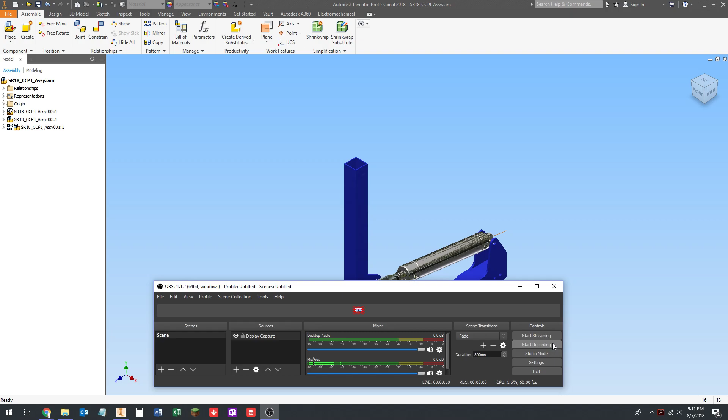Alright guys, we're back with our pneumatic pivot project. This is part 4. What we're going to do here is we're going to go through and we're just going to add fasteners to this.

There's not a lot. Essentially we're just going to put screws in either side of the standoff for the main pivot. We're going to put a screw and some washers to act as spacers on this end of the air cylinder, and we're going to do the same thing. We're going to put a screw and washers for spacers on this end.

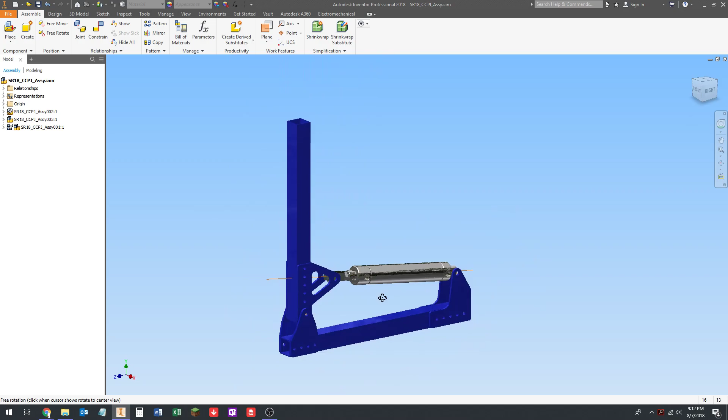For the washers, I'll show you guys how to use the pattern feature in an assembly, which is something we haven't really messed with in the CAD class just yet. Stuff we're not going to do, I'm not going to put rivets in. We never do that in CAD for FRC. It would take too long and doesn't really serve any purpose. The rivet heads don't stick out very much, and if there's any time where we're worried about a rivet hitting or something, we kind of just take some measurements to see if we have room.

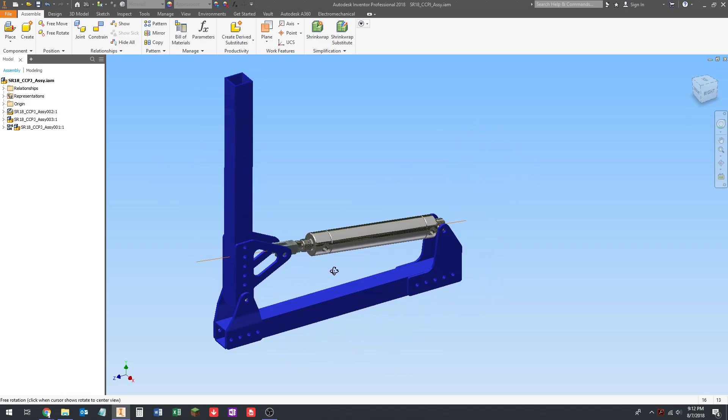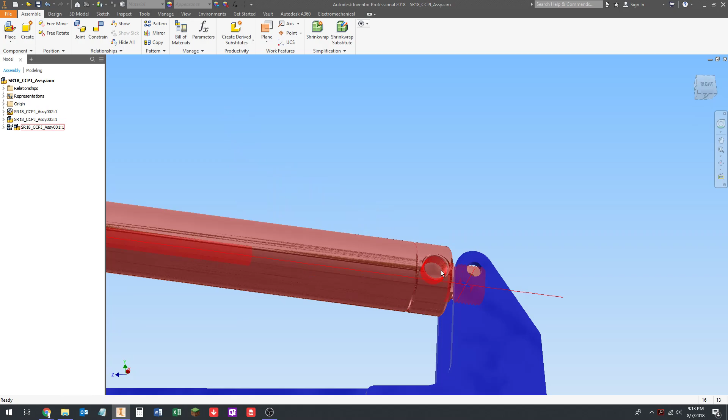And we're also not going to put fittings in the air cylinders. I don't think we've ever actually had an occasion to do that in our CAD models. If you're worried about clearance, you could put a fitting in there. Typically we kind of just eyeball it, and I can tell by looking at this, there's enough room to put a fitting here. It'd be a little close because the fitting does extend beyond the edge of the hole a little bit, but I don't see any problem there.

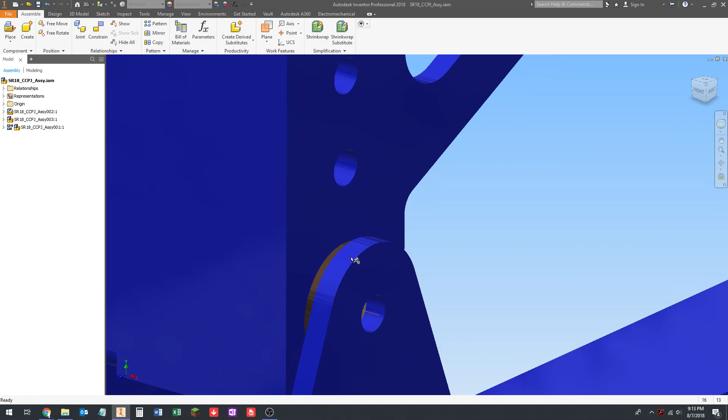Okay, so what we're gonna do is, well, I'll start with these because these are easy. So it's an 1/8 inch thick bracket going into a threaded hole. Threaded hole is about 1/2 inch deep. Typically, when we're putting screws in the end of standoffs, we pretty much always use 1/2 inch long screws. That's what we keep the most in stock, and the thread depth, especially when you take out this 1/8 of an inch for this plate, there's plenty of thread depth for them. So that's what we typically use.

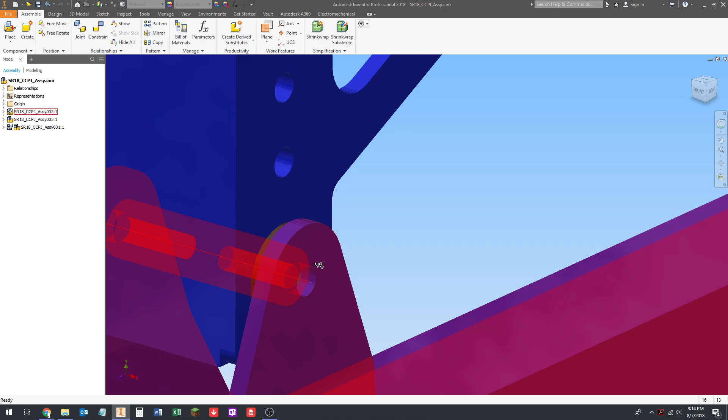I think we're going to use a button head just because it'll look nice here. Depending on what the application is, you could use a button head or a normal socket head. A socket head, you'd be able to get tighter without risking the screw stripping out. But you might need clearance for a button head or something. So we're going to use a button head. So this will be a button head cap screw.

Just going to download the CAD models from McMaster-Carr like we usually do. So it's going to be these alloy steel ones with the black oxide finish. They're the cheapest. We don't really need a lot of corrosion resistance. I talked a lot more in detail about different fasteners and stuff in the gearbox project. So if you haven't watched those videos, or if you weren't in the class, be sure to check those out because we go into a little bit more detail about some of our fastener selections.

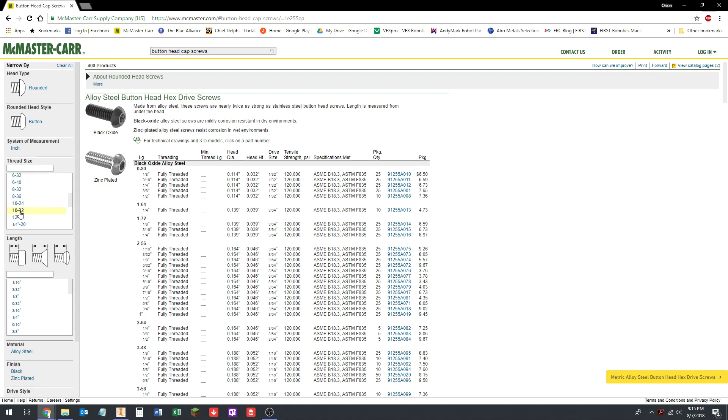So the thread designation was a 10-32 for the standoff, so we're going to pick 10-32 for the thread size. The length, 1/2 inch as measured from under the head to the end of the screw. So we're going to pick this black oxide steel one. Click on the part number, go to product detail, save it, give us a step file. So we're going to cut that out of there. I think I have it open. Yep. Alright, just going to paste this in here.

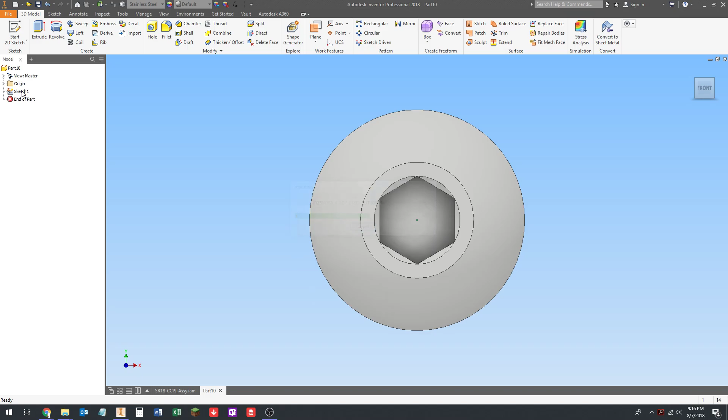This is something I do a lot, an archive folder, so I can throw old step files in there so that they don't get in my way, because there's no preview for the step file in Inventor, so you can't see what it is you're opening, and looking at file names can sometimes take a long time. So alright, we're going to open this up. That's the one we got there. Wait for it to load, click OK. Oops. Come on. Delete the sketch.

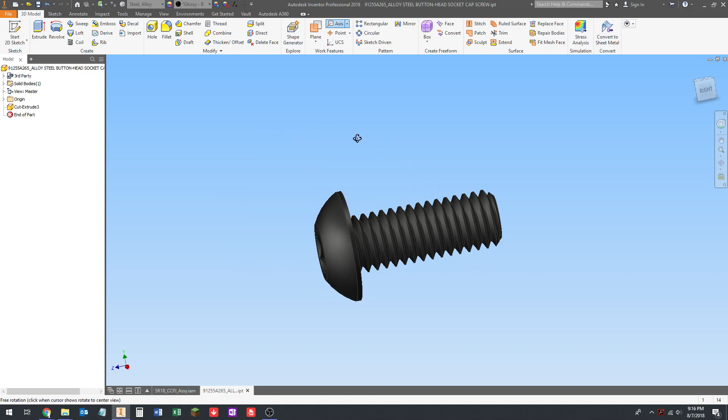We're going to pick steel alloy. Then I usually go for this glossy black color because it shows up nicely. Alright, so we got to pick a cylindrical surface, get an axis in there. We'll just go with the rim here. I think the domed head would work as well, but the rim's definitely a cylinder. So give that a save.

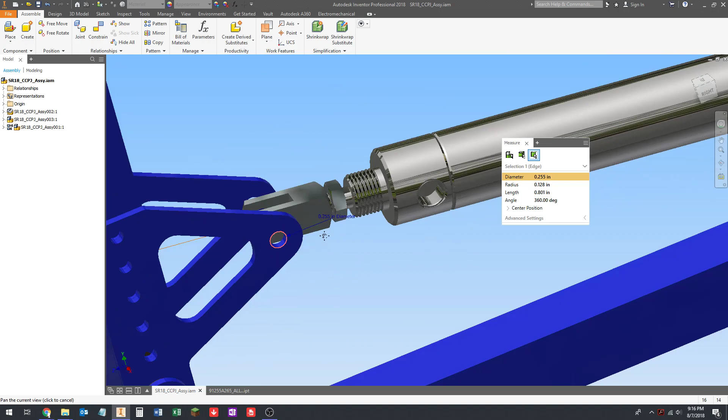We're not going to put these in just yet. I'm going to go ahead and get the rest of our CAD models going here. So let's measure this here; activate the measure tool with the M key usually. So it's a 1/4 inch, and we're going to measure from the outside to the outside. So we need 1 1/4, and then we're going to need a nut on this side.

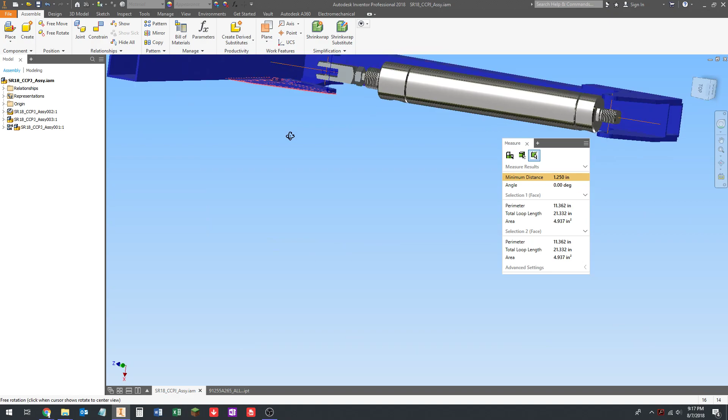Now what we're going to do is use a Nylock nut. What a Nylock nut allows us to do is we don't have to tighten it down all the way, and it won't come off. If we just used a normal nut, in order to get it tight we would have to smash these two plates together, which would bend them and damage the mechanism. So we need a nut that we can put on, and it won't come off, which a Nylock nut allows us to do.

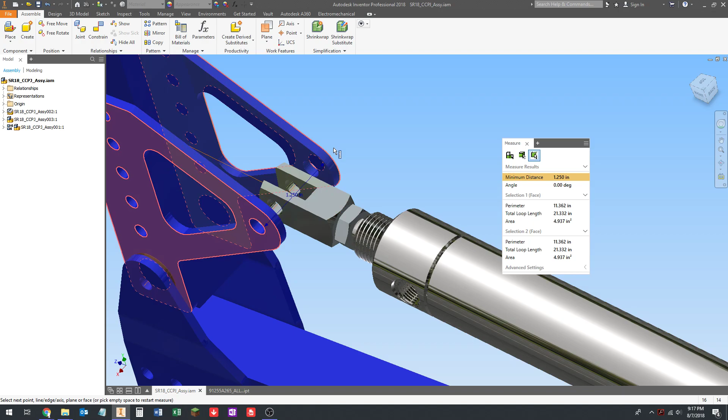Now, I think I'm going to do two different methods. I'm going to do a screw and a Nylock nut in one place, and in the other place I'm going to use a shoulder screw. And you can do either. With a nice fractional number like this, I believe you can get shoulder screws 1 1/4 inch long pretty easily. Typically you would use one or the other, but for this example I'm going to do one of each so that we can see both.

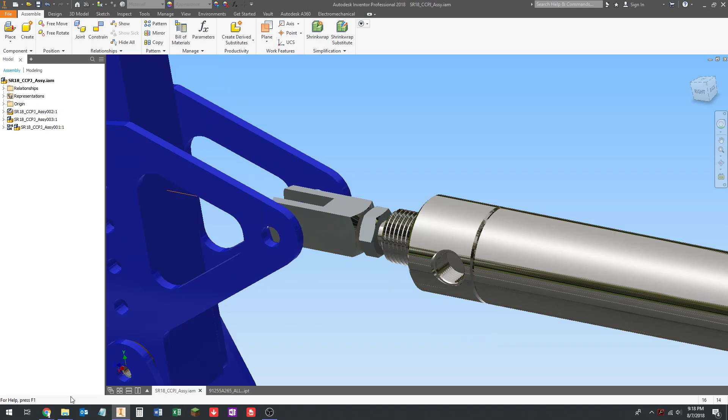So let's go look how tall the nut is first. Let's look at Nylock nuts, 1/4-20. They're going to be zinc plated. I can never remember what grade it is. So grade 5. I believe it's usually grade 5 that we use. It doesn't really matter for this because of the outside dimensions.

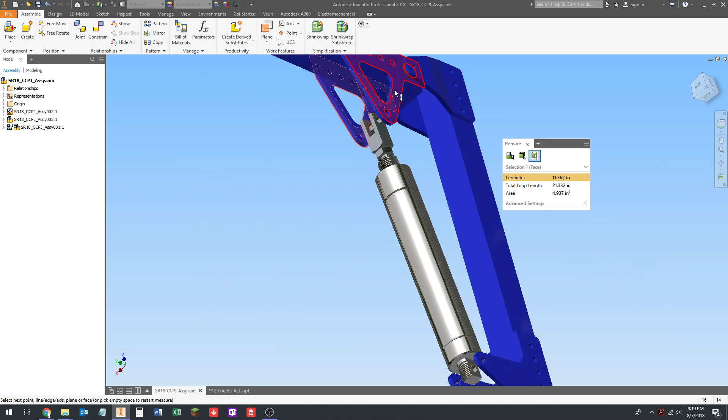Okay, so this is what I wanted to look at. The nut is 5/16 of an inch long. So we've got 1 1/4 inch plus 5/16, which is 1 and 9/16 inches. And the end of the screw is tapered a little bit, so you've got to make sure you get a full thread in the nylon. You don't want just the tip of the screw coming through because the tip doesn't have full threads. You want a section of the screw with full threads going through the Nylock portion.

So we're probably going to have to go with 1 3/4. It's going to stick out quite a bit on the back side of the nut, but that's a nice fractional size that we would have. I don't even know if you can get 1 5/8, but 1 5/8 is probably cutting it a little close. You probably wouldn't have a full thread here.

So we're going to download this CAD model. This is a 1/4-20 because, as I mentioned, this is a 1/4 inch. You could use 1/4-28 if you wanted. That did not save. There we go. It's pretty common with FRC teams to use 1/4-20 stuff, so that's why I'm doing that. We talked about that a little bit in the gearbox project. All right, so we're going to do a socket head cap screw. We're not going to use a button head here.

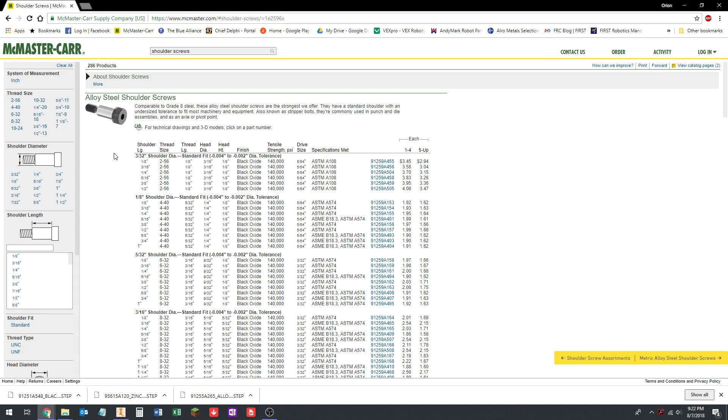So we know this one's the same, it's 1 1/4 inch. So let's do shoulder screws, alloy steel. We know the shoulder diameter is going to be 1/4 inch because that's what the part's going to be as a pin. So basically, the shoulder length is going to be our 1 1/4. That's a fairly common size. Shoulder screws always come in coarse threads, so we're going to have to do a 10-24, probably Nylock nut for this.

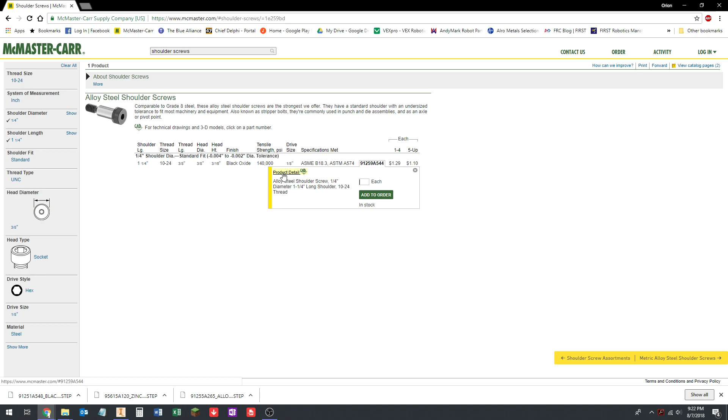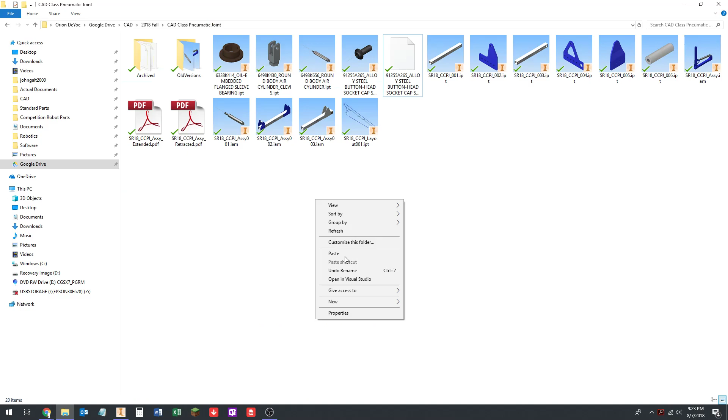Which means we're going to have to download another CAD model. All right, so let's download this. I'm going to rename this file because I know the 10-24 one's going to be named the same thing, so I want to make sure we differentiate between the two. Don't need that anymore, I'm going to archive that. You could probably just delete those usually, but I don't want to mess with it right now.

All right, so now we're going to get a 10-24 Nylock nut. So grade 5. Oops. I don't know, oh, so you only get low strength.

I don't normally order my nuts from McMaster-Carr because you can get them cheaper in bulk quantities from other suppliers. So typically for Nylock nuts, I'm not ordering them from here. I believe they are grade 5 from where I order them. I don't pay a lot of attention to it because in FRC it doesn't really matter.

Okay, so this is going to be a 10-24. Like I said, I'm just renaming these files so I can tell when I import them which is which. Cut that out and paste it in here.

All right, so we need washers to act as spacers. So flat washers, general purpose washers. Oops, keep going past it. 1/4 inch, 18-8 stainless steel is going to be the most common one. Just going to save that.

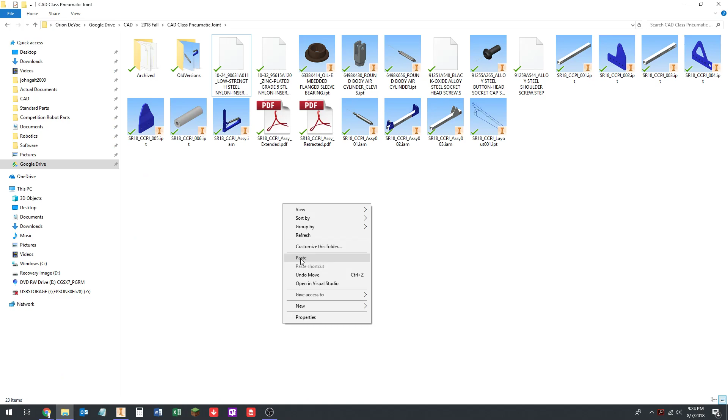All right, okay, so to review, we've got 5 fasteners here. So we've got, I'm going to go back to the CAD model here. So we've got a 1/4-20 socket head screw for in here.

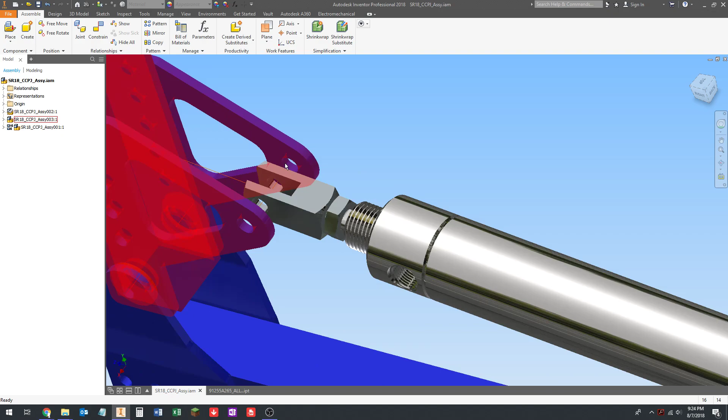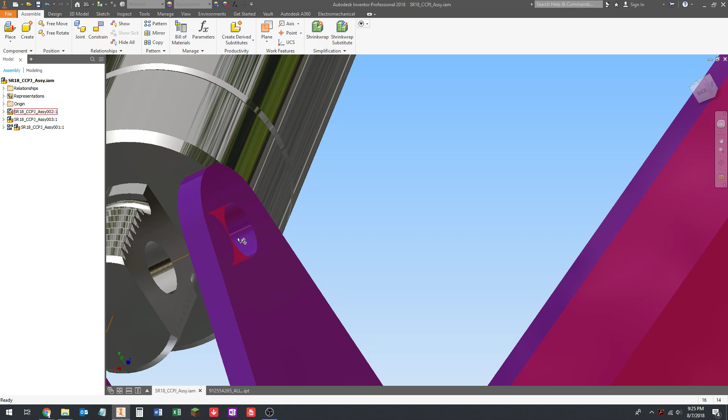That screw is going to have a Nylock nut that's not going to be tightened down all the way, it's just going to be tightened so it just barely touches this plate. Then we've got washers that are going to act as spacers in here. Then on this end, we're going to have a shoulder screw. The shoulder is going to be flush at this end, and then we're going to tighten the nut down, and we can actually tighten the nut down on the shoulder. The shoulder screw itself will be fairly loose, but it'll be held firmly in place, and that'll act as a better pin. And then once again, we're going to use washers as spacers.

So let's start importing, let's import all our files, and then we'll go into the assembly and put everything together. All right, so I'm just going to start at the beginning of the list and start going through setting materials. So this is going to be steel, and then I'm going to set the appearance to zinc because these are zinc plated. I'm also going to change, this is what I typically do, I go up to the solid bodies. For those of you who remember with the air cylinder, we talked about solid bodies.

Same thing here, you can color solid bodies separately in Inventor. So typically I go find this nylon thing and I just color it a nylon color, Nylon 6. That's fine. Alright, so then we need a work axis. I'm going to pick the work axis tool, pick some round surface, in this case this radius here, put that in there, and save that.

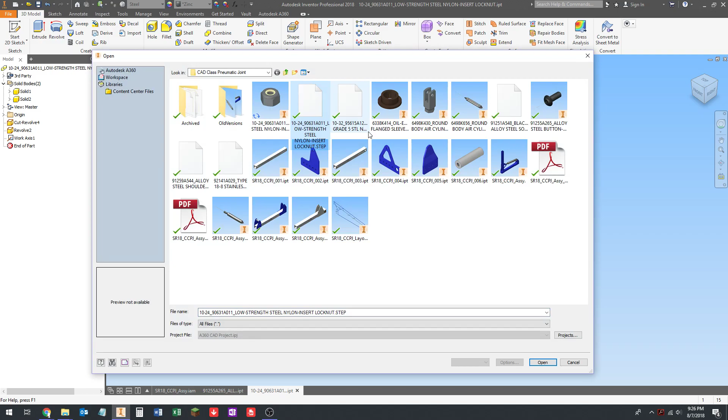Alright, so now I'm going to open again. So we did this one, we're going to do this one next, which is going to be the other nut, the 10-32 one. So that was the 10-24, this is the 10-32. Alright, so delete the sketch.

Set the material to steel, set the appearance to zinc, which I zoomed, go to the solid bodies, pick the nylon one, go up and set that to a nylon color, then pick the work axis tool, pick a round surface. Alright, give it a save.

I'm just using Control S to save, and then I'm going to use Control O to open. Like I said before, I always use keyboard shortcuts if I can.

Alright, this is our 10-24 screw here, or not our 10-24, this is our 1/4-20 screw here, I believe. Click OK.

Alright, delete that. Okay, so material for this is going to be alloy steel. The appearance is going to be black because it's going to be black oxide, like pretty much all the fasteners we use. Alright, and then I just place the work axis down.

I'm going pretty quick here because we've already done this once on the gearbox, so I figured you guys know how to do this. If I go too fast, you guys can always rewind the video.

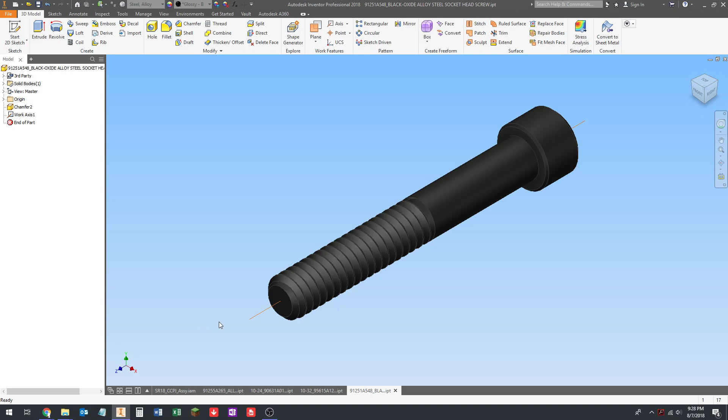This is kind of an optional part. In a lot of cases, we would not put these fasteners in an actual CAD model during the build season just to save time, unless there was some question about clearances and if some fastener was going to hit. So we usually just budget weight for fasteners, like 10 pounds or something, and that gets us by usually.

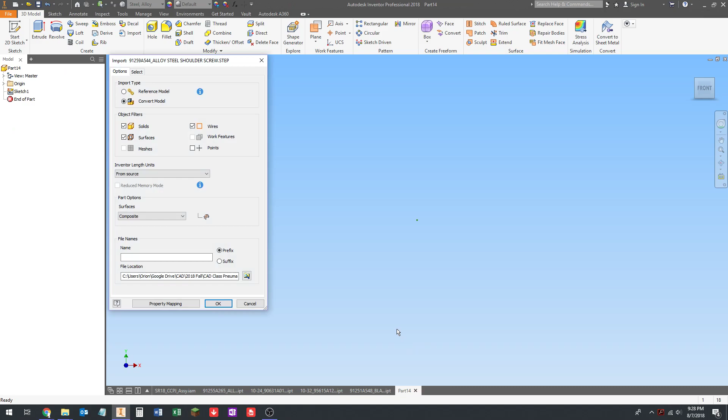So gonna keep going down the list. We got 2 more, including this one. Alright, so this is our shoulder screw. So this is going to be alloy steel, and there's no finish on these. They're precise enough that they can't really put a finish on them. So they're polished, and they usually douse them in oil, so they come in all oily, but that keeps them from corroding in a lot of cases.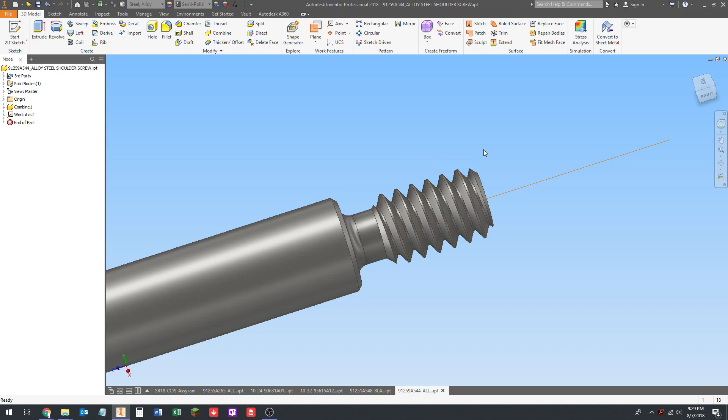So we're going to put a work axis here. We talked about shoulder screws briefly in one of the COTS segments in the actual in-person class. Basically how they work is there's a really precise length from here, which is called the shoulder, to under the head, and you tighten a nut down, and you can tighten it against this shoulder, and that means it doesn't squeeze anything in between. Then you can use this barrel, which is a really precise precision ground surface, as a pin.

These are also called stripper bolts, and the reason they're called that is a punching or stamping die typically has a part called a stripper, and basically what the stripper does is it pushes the material off of the punch. So if you're punching a hole in a steel sheet, your punch is going to go through the sheet, you're gonna have a hole, and a punch that fits in that hole. You put the sheet between the hole, which would be the die, and then you punch through, so the punch goes through the material. Well, it tends to get stuck, right? So you've got to have a part that pushes the sheet back off the punch as the punch retracts out of the sheet. And that part is called the stripper.

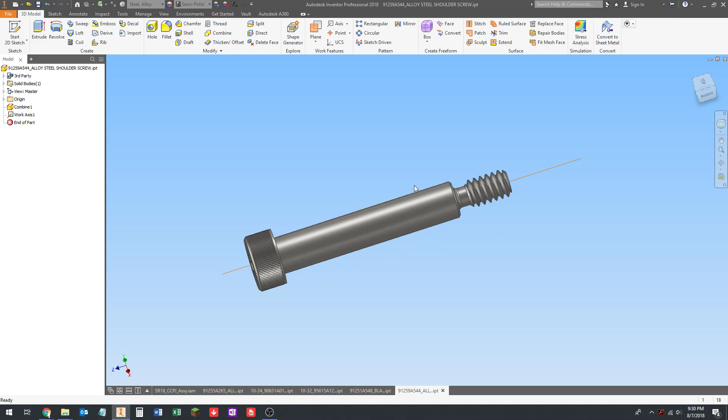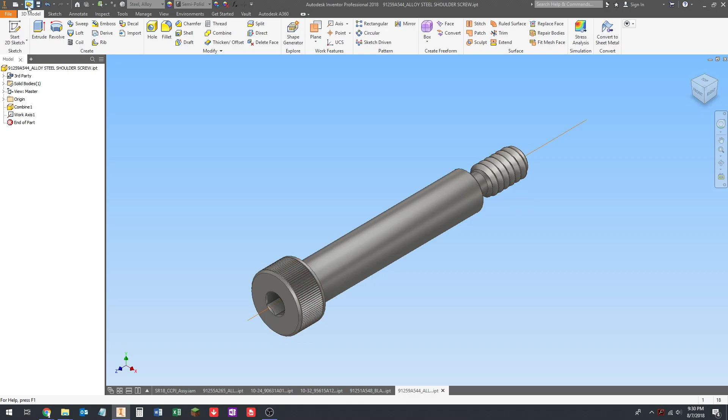Basically what the stripper bolts are used for is as a linear guide. The stripper would slide up and down on the barrel, and that's why the barrel is a precision ground surface, so it stays moving nice and smooth. That's what these are typically used for, but they're good for pins and other things as well. So that's that, and we just have our button head screw now, which should be this one. Oh no, this is the washer, we already did the button head screw.

Alright, I'm going to delete this. Delete the sketch. Set this to stainless steel, which is what it is.

Axis, just pick the inside of the washer. Save it. Alright, I'm going to close all these because we don't need them open for assembling. Don't need that one either. Alright, so let's start with the button head screws here.

So I'm going to do my right mouse drag up trick to do the place component command. You can also click it on the ribbon if you want. Alright, so pick our button head screw.

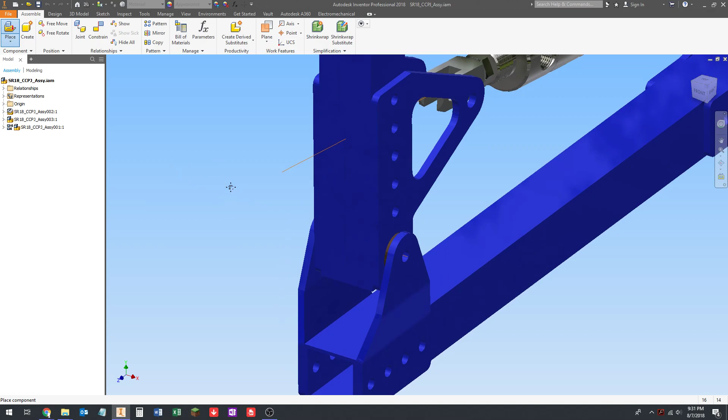I'm going to rotate once by the y-axis, place it down on this side, and then I'm going to rotate twice by the y-axis again, place it down, press escape to get out of the tool.

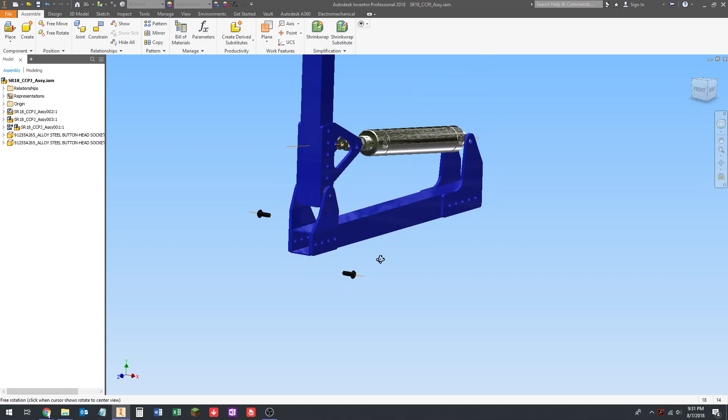Alright, so I'm going to activate the constraint tool. I'm going to constrain this using the work axis. Actually, no, I'm not. I was talking about in the in-person class last time, today actually, and I was saying I need to get more in the habit of using the insert constraint because it really is a lot easier. So I'm actually going to use that.

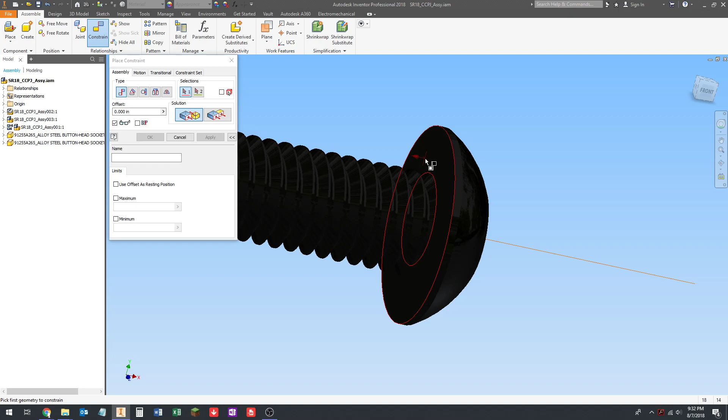So to use the insert constraint, normally I would constrain this work axis to this hole's work axis, and then I would constrain the head, the underside of the head, which is the flat surface, to this flat surface. Two constraints. Basically what the insert tool does is it does those two constraints in one constraint, so it saves you mouse clicks. And really, it's meant for fasteners. That's what the insert constraint is for.

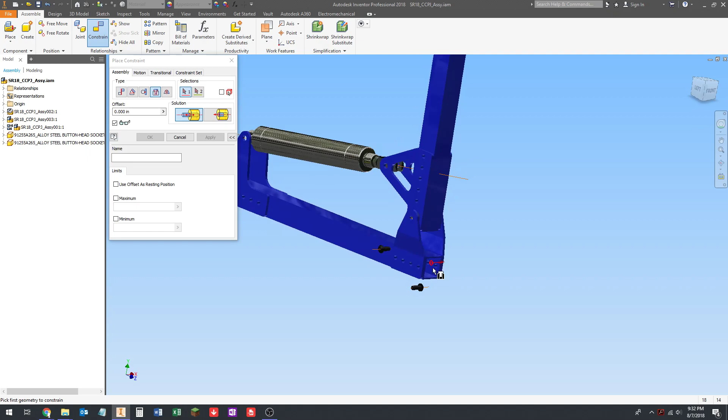So if we go up here to the place constraint dialog, it's the fourth one over, this one right here, insert. There's two different directions, but this first one is going to be the one you use most of the time. Basically what you're going to do is pick a circle, and you want to make sure you pick a circle that's on this flat surface of the underside of the head. So I'm going to pick this outer rim here, and you can see this arrow is facing towards the end of the fastener, which is what we want.

Then I'm going to pick another circle, which is going to be like the rim of the hole. And basically, these two circles need to be on the planes that are going to mate. So you can see, I'm going to undo that. So I'm going to go back and undo this again, but I'm going to pick a different circle.

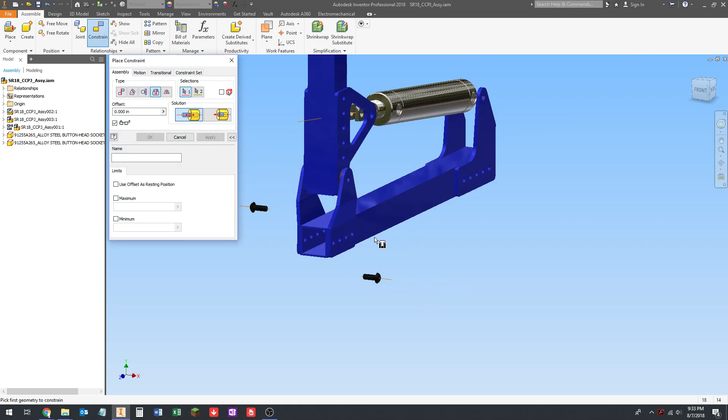So if I go to the insert tool and pick - oops, I hit the escape button by accident. Insert. Alright, so if I pick this circle, same circle I picked before, but if I go and pick the back of the hole, you'll notice it puts the fastener on the other side, which is not what you want. So you want to make sure you pick the right surfaces.

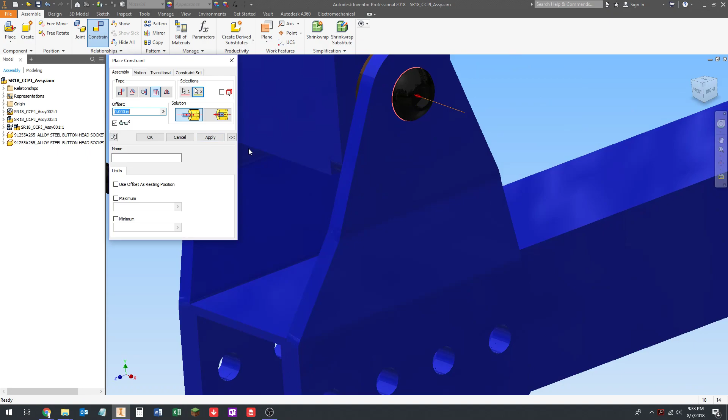Alright, so that's good. I'm going to press enter. Alright, so I want to explain something. I haven't explained it in the in-person class, but I want to make sure we're clear. So I was able to constrain that and then press enter without clicking the apply key.

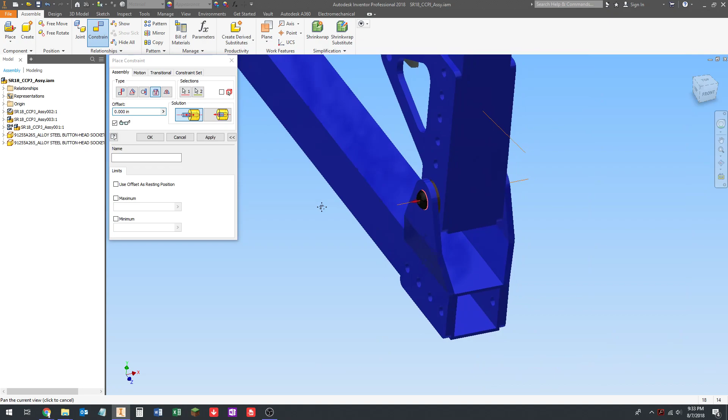However, I'm going to do something different. So I'm going to constrain this, constrain that, and now I'm going to move the view. I just panned, you could orbit, you could do anything you want, but I moved the view. Now if I press enter, it doesn't work. And the reason for that is because when I move the view, this dialog becomes grayed out.

So in order to be able to press enter, this dialog has to be selected. So if I click on it, it gets back selected. Now I can press enter. So if you're going fast with your constraints and you happen to move the view before you press enter, which is easy to do, it's not going to work. You're going to have to click on the window and press enter, or just click on the apply button. Okay, so those are those two.

Let's place more components. Let's keep on going here, and I just lost my previews. Great.

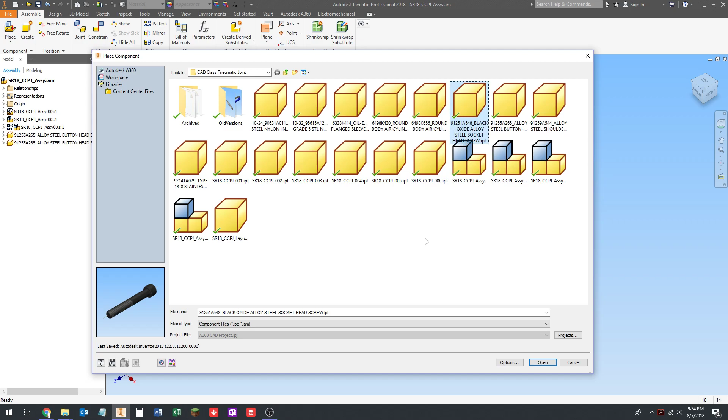All right, it's that one. I had some weird Windows glitch where Inventor will stop showing these previews. I don't know what causes it, but you have to restart your computer to fix it, if I remember correctly. All right, so that's the one I want. I'm going to rotate 3 times by the y-axis because I want the head on this side. Doesn't really matter, but that's the way I'm going to do it.

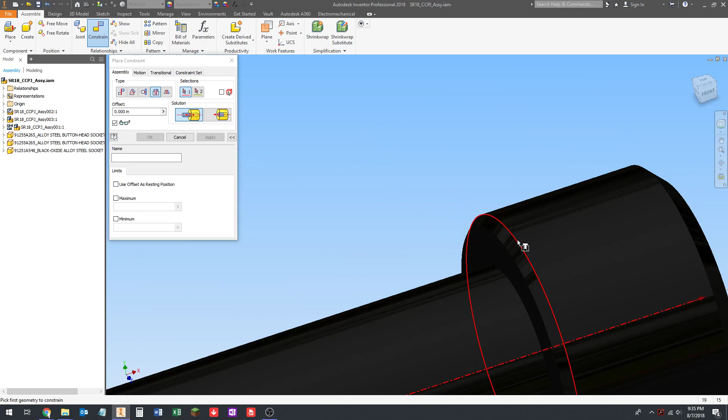So place that down. I'm going to use the insert tool again. Now these you got to be a little careful because they have a chamfer here. You want to make sure you don't grab this outer part of the chamfer. You want to grab this one because, like I said, you need to pick a circle that's on the flat face of the fastener. I'm going to pick that. Pick the rim of this hole.

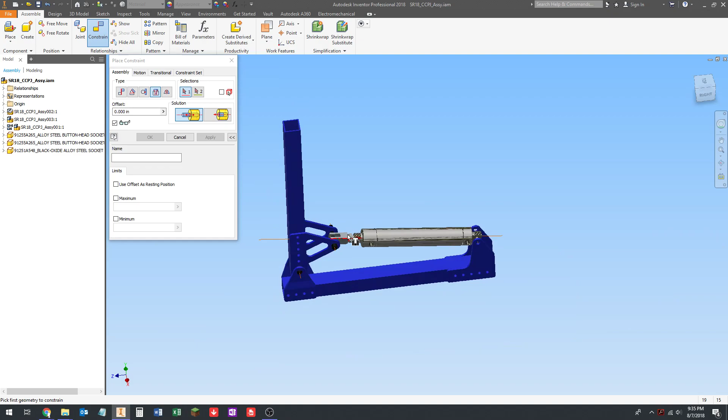That should be good. Okay, so you see how much is sticking out here. I mean, the nut's going to take up a decent amount of that, but that's more than we really need. But it'll be okay. All right, so let's place our nut. This is 10-24. We want that one. 10-32. Oh no, we don't want 10-32. Oh, did I download the wrong nut? I downloaded the wrong nut. I didn't need a nut for this. I'm an idiot. Okay, I got one more to download.

I screwed up. Okay, so we're going to go back to this. I need a 1/4-20 Nylock nut, not a 10-32 Nylock nut. Grade 5, product detail, save. Cut. Oh, I just lost it. Gosh darn it. It's this one.

You can't actually type 1/4 because you can't use a slash, so I usually just do .25-20, which is a horrible, horrible thing, but it's the way I do it. All right, so let's open that. Let's go to this one. Sorry about that. I was talking and downloading files at the same time, and I went and downloaded the 10-32 out of habit.

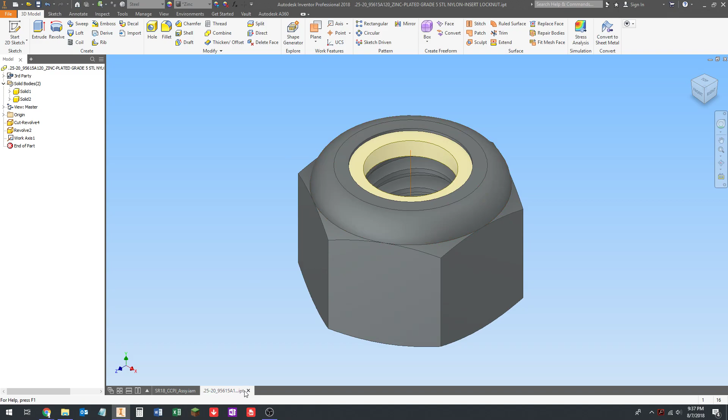Okay, delete that sketch, set the material to steel, set the appearance to zinc, set the nylon portion to nylon, place our work axis, give it a save, close the file, go back here, pick the Inventor model, and I forgot to turn off my Google Drive syncing. Let me do that before it causes me problems. Pause. Alright. Bad things happen if you're syncing and working at the same time in Google Drive, so I want to make sure.

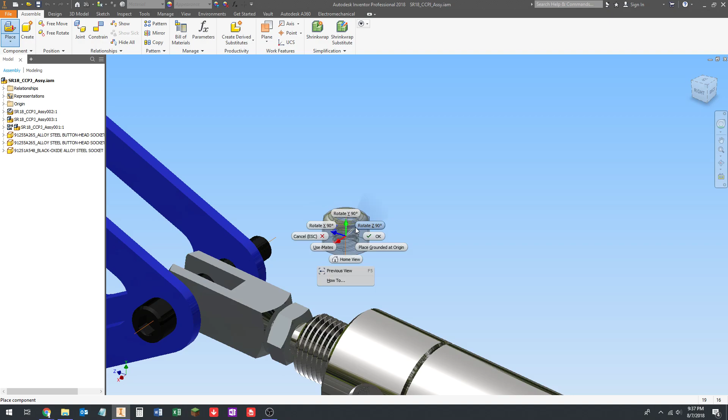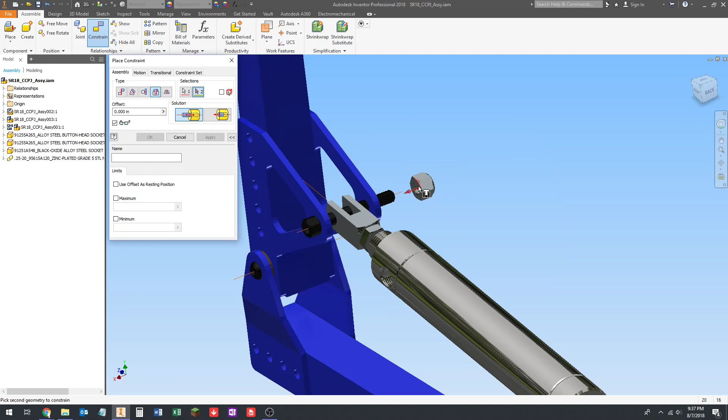Alright, so rotate it once by the Z-axis to turn the nut the right direction. I think I can use the insert on this round surface. Some fasteners you're not going to have a round surface, you're going to have to constrain it normally, but alright, insert, I'm going to grab that. It can be an arc, doesn't have to be a circle. And then that circle there. Alright, so you see how much is sticking out the end, but that's kind of unavoidable.

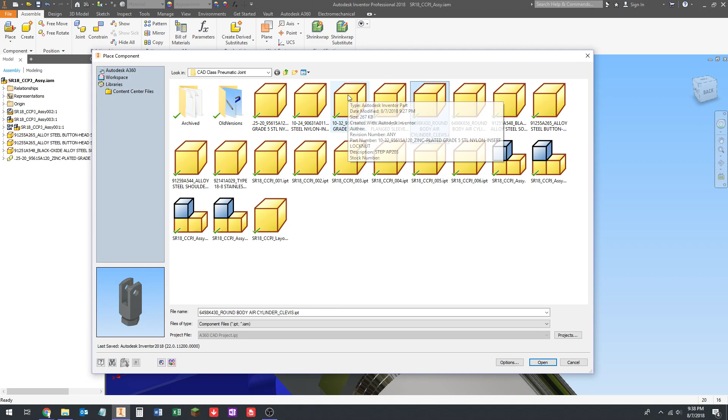Alright, so let's, well, need the washer. There we go. Alright, so once by the Z-axis. Same thing. Constrain, insert, pick a circle, pick that circle, and apply. And I actually should have placed two of these. Come on. There we go. Once by the Z-axis. Constrain, insert, pick a circle, pick that circle.

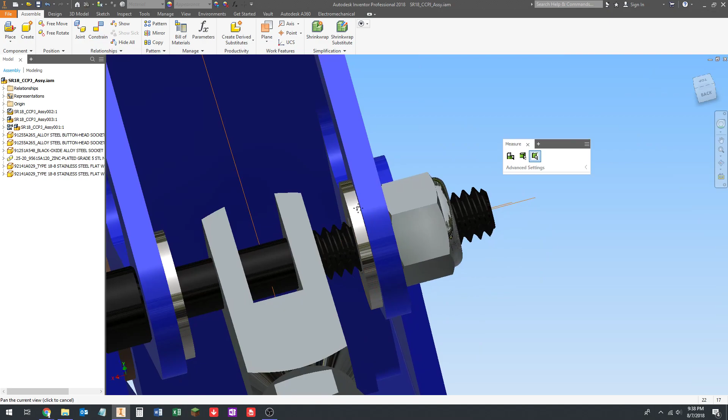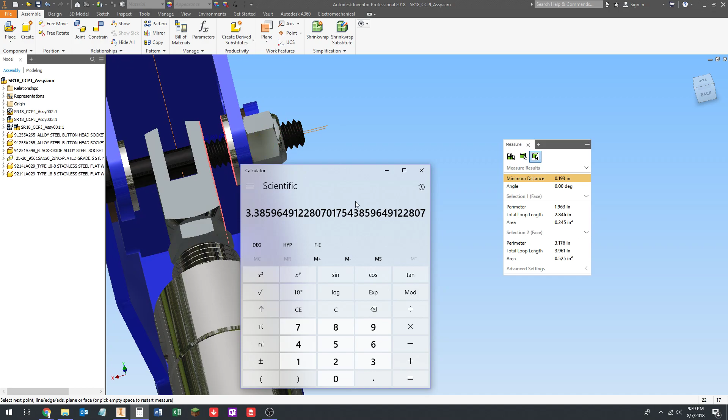Alright, so now let's get the measure tool with the M key. Let's measure the thickness of this washer. So 0.057. So if I measure the distance between here and here, I just need to figure out how many to stack up. 0.057. Alright, so it's 193. I'm not doing this in my head. So I can get 3 more in there, and I can't obviously have 0.38 of a washer. So that's going to be 4 stacked up.

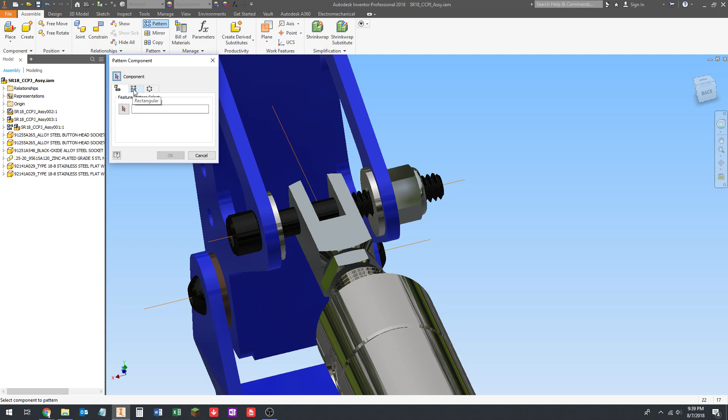So here's what I'm going to do. Well, actually, I'm not going to click on it. I have nothing selected. So I'm going to go up under the Assemble tab, where it says Pattern. Click on Pattern. Now, I want a rectangular pattern. In this case, I'm just going to pattern in one direction, but I want a rectangular pattern. So I'm going to pick Rectangular. Then you got to pick the direction that you want to pattern one of the rows in, or the column in this case.

So pick the arrow, which is the column direction. We just got to pick an axis, so that works as an axis. Now the arrow is going the wrong direction, so we're going to click this little curvy arrow thing and flip it the other direction. Now we know the thickness is 0.057, so that's going to be the center to center distance. So we're going to go 0.057, and then

oh, right, we got to pick components. Well, we're going to do 4 total. So 4 includes the original. You want to make sure it's including the original. So we need 3 more, so it's going to be 4 total. So we're going to pick the component by clicking on this arrow and click on the washer, and it stacks a whole bunch of them up.

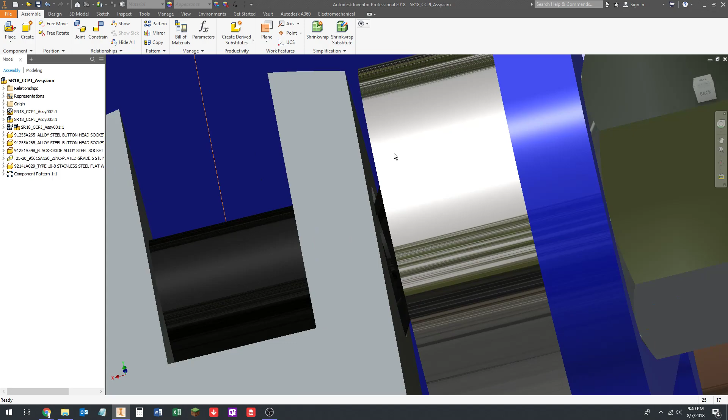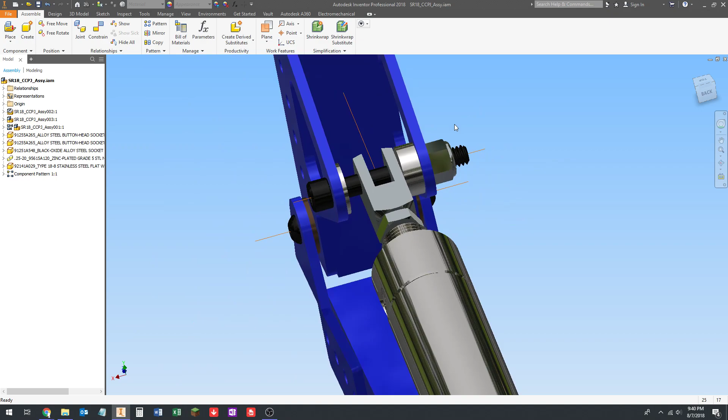Now, like I said, normally we wouldn't do this, but I just wanted to take this opportunity to show you guys how to use the pattern feature, and then it shows up here in the browser as a component pattern. And all the elements are here. So that's an easy way to place a whole bunch of things. You got to be a little careful when you're using this. You can overuse it, and then it just becomes impossible to work with. I don't use component pattern very often, but in some cases like this, it's pretty useful.

So we're going to do the same thing with the other one. We could have done both of these at once, but that's not the way it ended up working out with the way I constrained it. You can also select the washer, then click pattern, and then you don't have to go up and select the component because the component's already selected. All right, rectangular. We're gonna pick our column. We didn't have to click on the arrow because when you already have the component selected, it knows you want to pick the direction first.

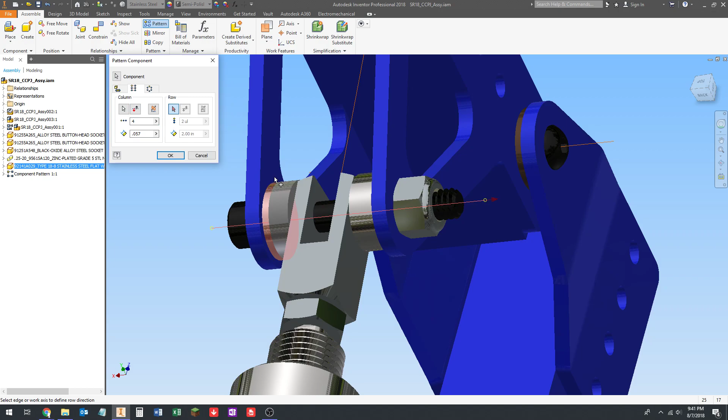All right, so that direction is right. You can see it's a pattern of 2 with a 2-inch center to center distance, so it's floating out here. So we want this to be 0.057, which is the thickness of the washer, and then once again we want 4 because it's going to be the same on the other side, and click OK. Alright, so there's a little gap, but that's not a problem. That's plenty tight enough to keep the cylinder centered.

Alright, so let's drop in our shoulder screw down here. So I'm going to place component. I know it's this one. I'm going to rotate once by the y-axis. I'm going to keep the head on the same side as the head of this screw. Once again, doesn't really matter, but that's what I'm going to do. All right, place that down right there. Press escape to get out of the placement tool.

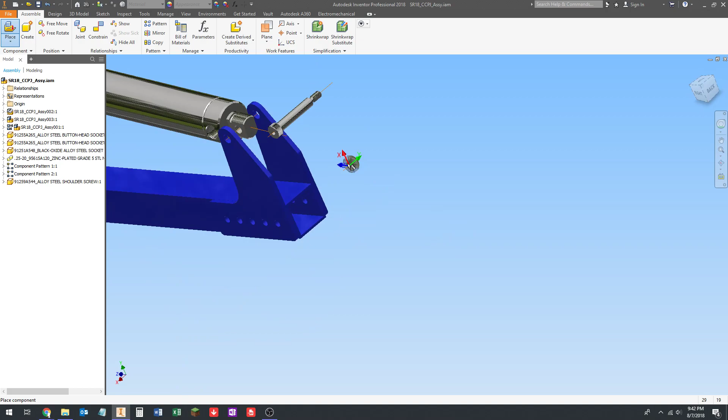I'm actually going to go ahead and drop my nut in just so I don't have to do this again. So this can be the 10-24 nut. I'm going to rotate once by the z-axis. Yeah, it's facing the right direction. Okay, so I'm going to just place that down there. Press escape to get out of that. All right, so I'm going to constrain. I'm going to go to insert.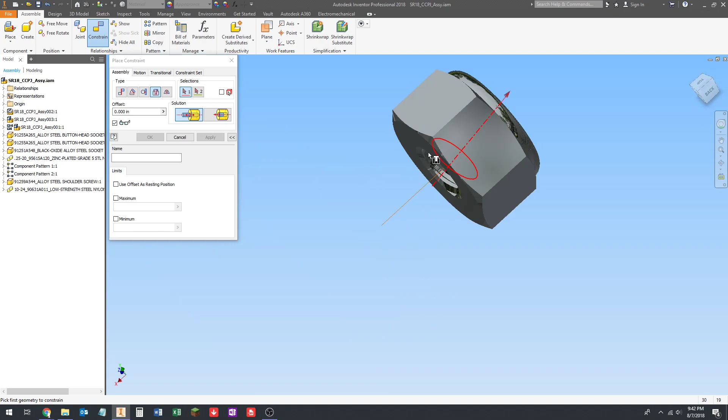I'm going to pick the bottom of the head, just like we would for any screw, edge of the hole, enter, and then the nut, I'll pick this arc here, and you see how the end of the screw is flush with this surface, so I can just pick the edge of the hole. I could have picked the edge of the bolts as well.

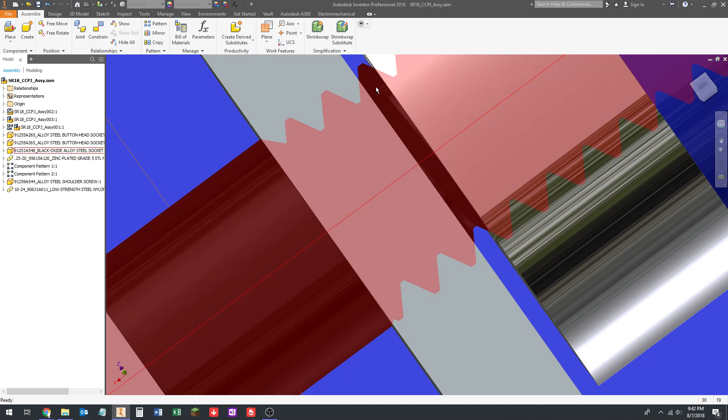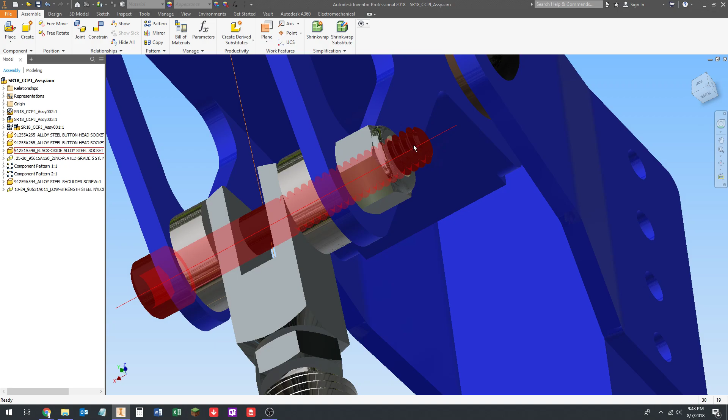And then we've got this nice round surface, because the problem with doing it this way is you could have threads. You see how the threads are inside of the clevis, which means you don't have a nice smooth surface for this to ride on, so it can eat up your clevis and stuff. So this is typically okay, especially since the clevis is steel, especially for an FRC application. This really doesn't cause any problems. The screw threads in the aluminum do cause problems. So if this was a high load mechanism, this would not work at all.

So this only works for really low load stuff, because the threads can eat at the aluminum after you cycle this a bunch of times. We've done it on Stellar, but we've also had to deal with it damaging the aluminum bracket. So in a lot of cases, the slop that it generated was not an issue, so we just kind of ignored it, and it was able to make it through the whole season and all of our off-season events. I mean, something like this, if it makes it through 7 events or something like that, it's good enough. It's not in good shape by the end of the season, but it makes it through.

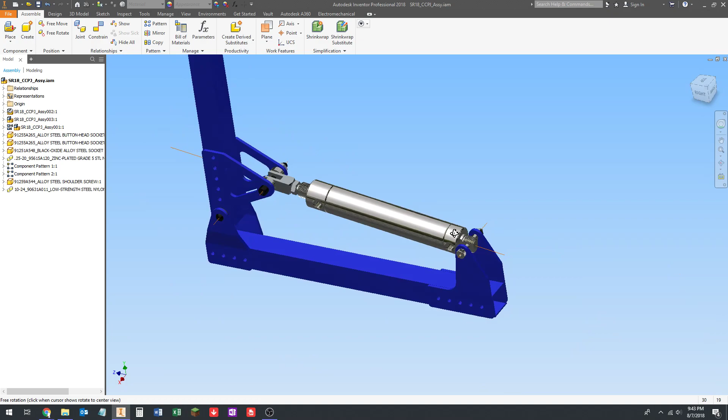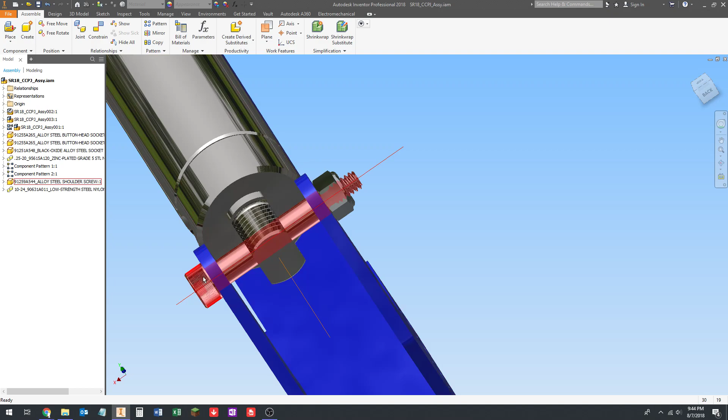But the shoulder bolt is definitely the better way to go. The problem with the shoulder bolt is you're constrained to the lengths of the shoulder you can get. In this case, it happens to work out really nicely. In a lot of cases, you might either have to change your design so you have a nice fractional distance between the two plates in this instance. Or when you tighten the nut down, there'll be some extra left over if you're doing something with a weird dimension. Hard to say. But in this case, it doesn't really matter.

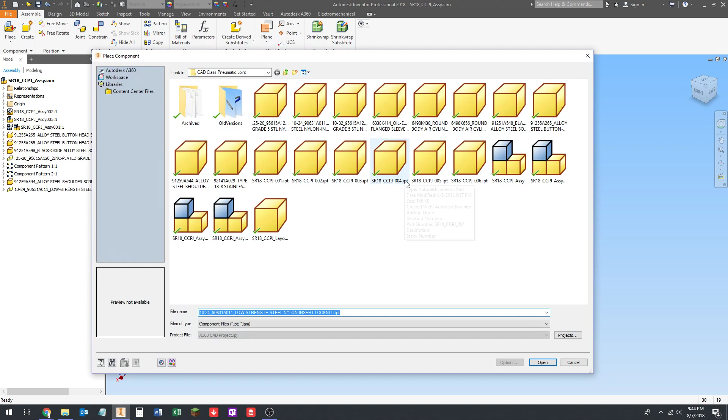All right, so we're gonna place some washers in here, and we're gonna do this a little bit differently just to show you. So I'm gonna rotate once by the z-axis. I'm gonna place 2 down. Press escape. All right, constrain, insert. Pick the edge of the washer and the edge of the hole, apply, edge of the washer. Now I'm going to constrain this against this side of the air cylinder so that we can do both stacks of washers in one pattern. So pick the edge of the hole, click apply. All right, I press escape.

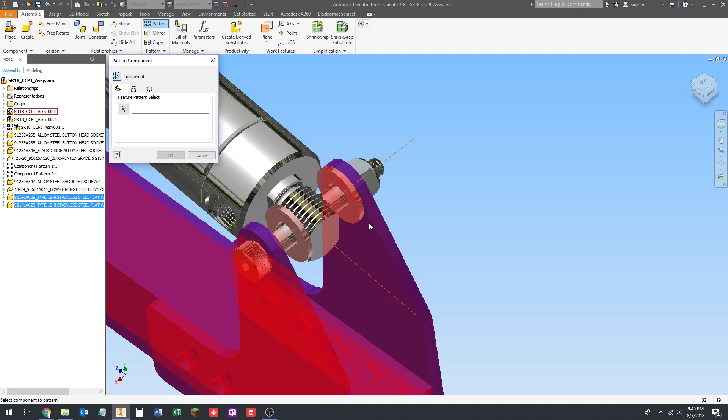Then I'm going to go back to the pattern tool. Now I have not selected my components yet, so by default, this component selection tool is activated. So I'm going to pick that, and then I'm going to pick that. You just click to select multiple items. So both of those are selected now. So I'm going to go to rectangular. I'm going to pick column. I'm going to pick this work axis, and then I want it to go the other direction, so I'm going to click this flip direction button.

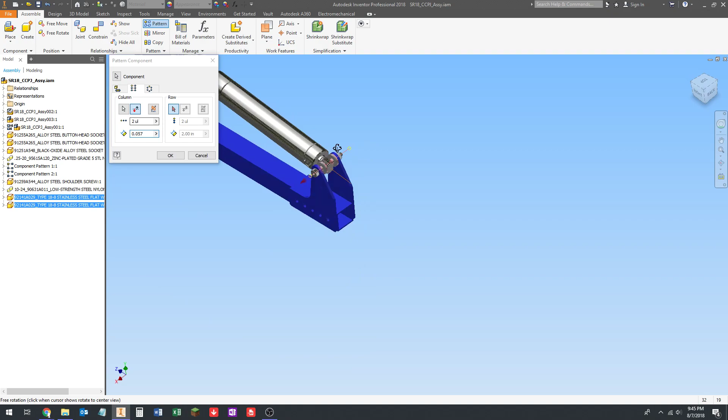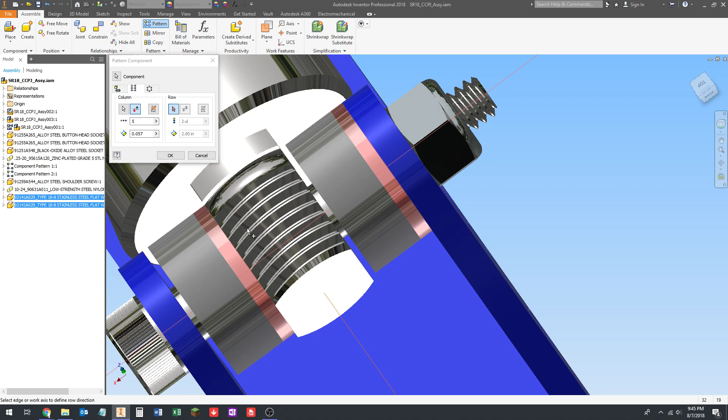Now we know the center to center distance is still the thickness of the washer, so 0.057, and we want, I didn't measure it, but we can just eyeball it. Yeah, 5 is good. That's another thing too. You can just eyeball this if you want, but if we go 6, it'll clip. You can see it's clipping into the part, which is not what we want. So that's 5.

So you'll notice, because we're patterning these two as a set, it's patterning multiple parts at once. We had to pattern them both the same direction. So we had to constrain this against this, and then the gap is on the outside as opposed to on the inside here, which in this particular case doesn't matter because these washers are going to rattle around loose on this rod anyways. So this just saves you from having to do 2 patterns. So on this end here, this is one way to do it. On this end, this is the other way to do it.

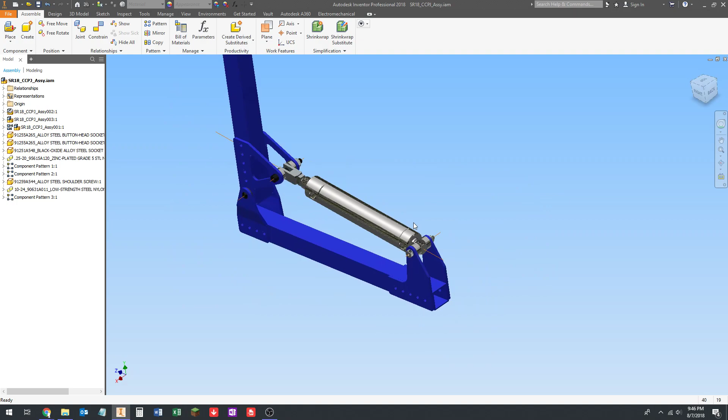CAD students, if you guys want to pick one or the other, I am perfectly okay with that. So if you want to do it the same way on both ends, you can do both of them like this, or you can do both of them like this. It's up to you. You can take a little bit of liberty with your design there, I guess.

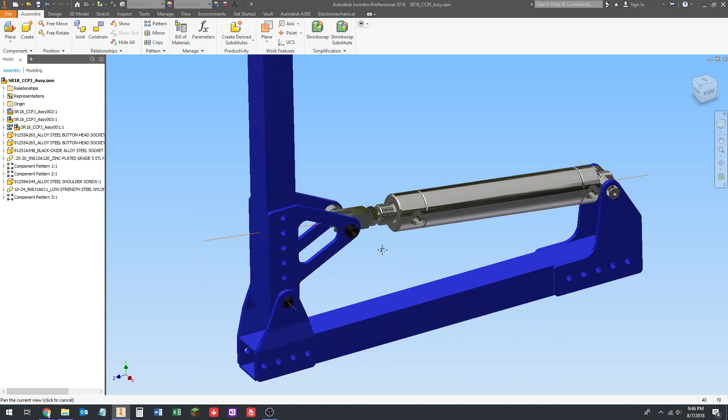But this is as far as we're going to go with this project. This is the final product, and not too complicated, but it's a good thing to be able to know how to do, because you're going to build structures like this multiple times on every robot.